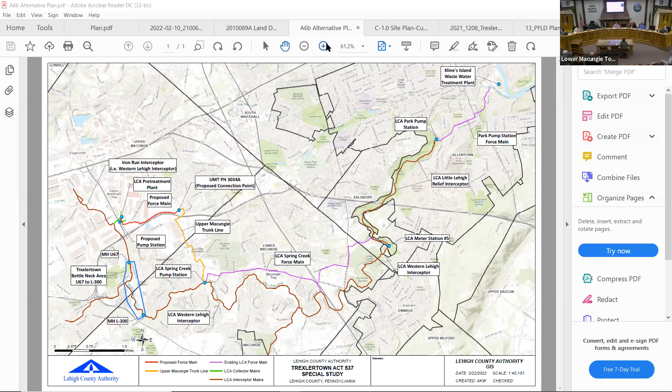Nate, if you can point for me, I want to start at the top of the system. It's hard to see, but the LCA Pre-Treatment Plant—Nate, if you can zoom in a little bit—sits in Upper Macungie. Then as you keep on going down with your pointer, the Western Lehigh Interceptor, keep going south—that area in blue is the bottleneck, and it's been an issue for some time now. This study is going to address that particular issue.

I do want to point out the boundaries. You can see, Nate, that diagonal line between Upper and Lower Macungie, so the problem splits both townships. The problem is that the pipe was laid too flat back in the 70s, so there are dry day and wet day problems in that particular area. And the problem with this area is that we're at the top of the system, so if you fix this part, we're just going to be pushing it further downstream. So we were in a predicament.

What we landed on was actually a suggestion from Upper Macungie. Nate, if you can point your cursor to the Upper Macungie trunk line—it's hard to see, it's that orange line. In Upper Macungie, they call it the trunk line, but in essence, it's an interceptor, and that collects Upper Macungie's waste, and actually Lower Macungie ties in a handful of times to that trunk line as well. That trunk line follows Mill Creek Road all the way down past the Walmart, and then it ties into just upstream of our Spring Creek pump station.

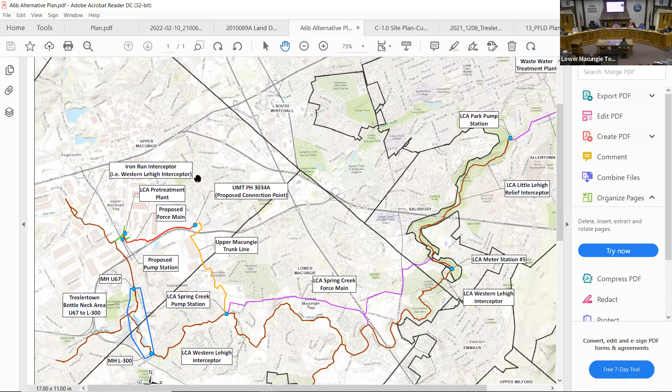One more question: the problem area, as you described, will that still stay in service? It's just you're diverting some of that flow to the proposed trunk line, correct? Yes, the area highlighted blue will still remain in service, it just won't see as much flow. Correct. Not to get too far in the weeds, but we're basically going to divert half the flow into Upper Macungie's trunk line, and it's all going to be controlled by actual levels in the Upper Macungie pipe.

And you've already approached Upper Macungie Township with this? Yes, they're on board. For my edification, you said the cost was divided between 7, what? Yeah, the Western Lehigh group, made of 7 municipalities, right? So we bear some portion of that. Yes.

So this is the first step to get DEP approval. Then we have to submit what's called a Part 2 permit, but you can't submit the Part 2 permit until 537 approval. So again, no specific response is needed if none is deemed necessary by the commission. If the two townships respond quickly, would that speed the process up? It would.

Unfortunately, Upper Macungie's planning commission doesn't meet till mid-April, so we're kind of stuck with that, but the sooner the better. What action are you looking for the planning commission to take? No real action, if there's any comments, just submit them, and they will be addressed in the final submission.

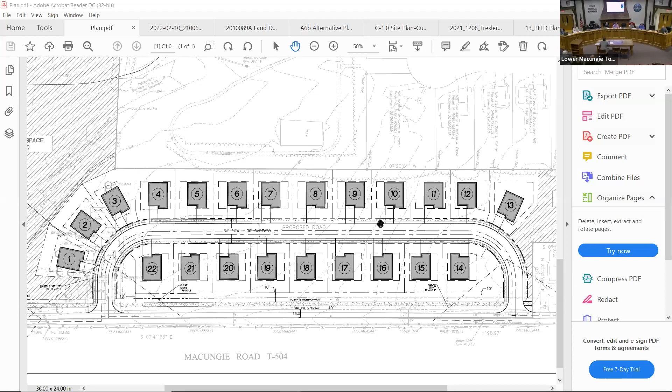And the screen's back up. Sorry, there was a glitch for a little while there where it wasn't up, but residents watching now should be able to see the plan. Are there any specific issues the applicant would like to bring up?

There's a few things I'll go over, and I'm going to take one out of order because I have a question. So on the lot area question, when I look at the SALDO, it says minimum lot area is the land area required for the creation of a lot as specified in the township zoning ordinance. And the zoning ordinance for lot area says an area of land determined by the limits of the property lines, and any portion of a lot included in the street right of way shall not be in the lot area.

So we do have some extra, the lots were larger than the minimum anyway. I'm not necessarily saying we wouldn't be able to accommodate it, but the engineer just had the question of why, if the SALDO references the zoning definition, it would be something different when there's no minimum lot size in the SALDO.

I thought the lot area definition stated that in the SALDO. That's the confusion he had, because he said you look in the SALDO definition and it makes you subtract certain things out. But when you look at the minimum lot area definition in the SALDO, it says refer to the zoning ordinance. So his only question was, are there other reasons why we subtract those out? Because to determine whether we meet the minimum lot area, it says go to the zoning ordinance.

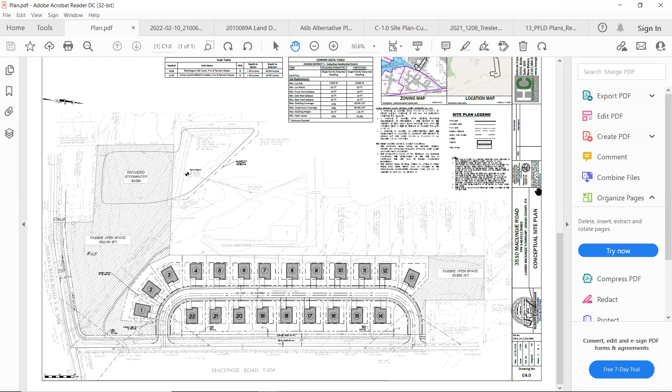Thank you for that input, I would definitely take that into consideration with my engineer. I think it needs to be public standards. And I believe the right of way shown here is 50 feet and the cartway is 30, which I believe does meet the minimum township requirements. Obviously there's no details about paving spec or anything like that yet.

Because I thought it would be difficult for a homeowners association with only 22 property owners to maintain a road. I think that's a heavy lift for the homeowners association.

But that's fair, that's an issue that's debated at the commissioner level. So you might want to see the commissioners as to whether or not they're willing to take the roads. That might be an issue you want answered sooner rather than later.

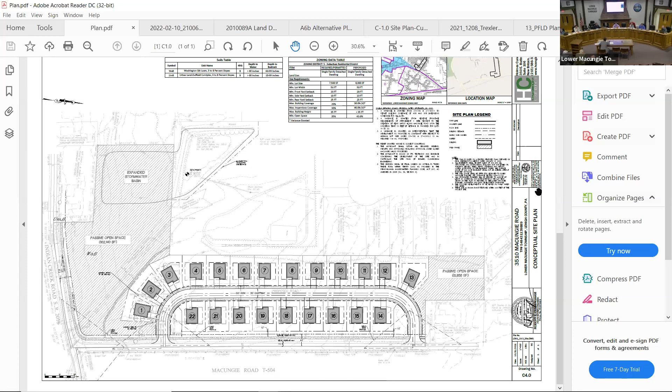Understood. All right, any other comments or questions? All right, we'll open it up to the public. Any comments from the public? Checking to see if we have anybody in the chat here. If you are a member of the public and you want to type a chat, please feel free. All right, we have a person with a question, Mr. Robert? No question, just a statement.

I would like to thank the applicant and his attorney and so forth for listening to the township and trying to move it in this direction. I think they've done a great job of trying to accommodate the wishes of the township, and would like to commend them for their plan. Thank you, and please come back to every meeting.

All right, well, this is only a sketch plan, so the Planning Commission doesn't need to take action, and we'll see you probably in a couple of months. Yeah, hopefully. Thanks for your time. Thank you. Thank you.

Okay, the next item on the agenda is the preliminary final land development plan of NH-Macungie, PA-1-UT, LLC. Nate, you want to bring the plan up and review it? I am. All right, and for members of the public, I'm starting the screen share here momentarily.

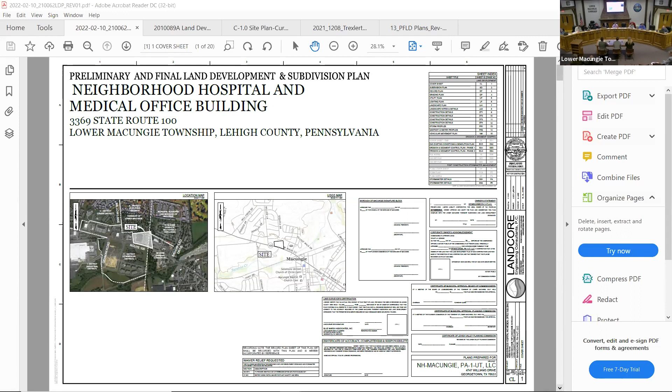Okay. We have the updated plan here for the neighborhood hospital that has been previously brought before the Planning Commission and now the Board of Commissioners for conditional use hearing. I should note to the Planning Commission, just so everybody's aware, the Board of Commissioners directed the Township Solicitor to put together a conditional use decision for approval for this, which I don't know if it has been circulated yet, but they did vote in the affirmative to proceed forward.

from a conditional use perspective. What's before us tonight was previously a preliminary plan. We're looking at a preliminary final plan now. So that's a new waiver request, but staff takes no exception to that, given the detail of the plan. I'll be frank, for members of the public, it includes a neighborhood hospital, which you can see here fronting upon Route 100, where the current old Weis is. That would be demoed and the new neighborhood hospital would be put in.

And there is a medical office building proposed at the rear of the site in the northeast corner. There's ancillary parking. I should note one thing that we have discussed consistently with partners in Macungie Borough, but also with members of the public, is it's our anticipation that this proposed development will reduce traffic from its prior traffic load on the site. And the current improvements on site are also reducing and ameliorating stormwater issues in this generalized area. So we're getting an improvement on both ends there. It's also our expectation we're getting an improvement in terms of lighting. The lighting will be dark sky compliant, so there'll be less glare from what's currently there.

We have received and reviewed prior renderings that we're quite comfortable with in terms of architectural scale and integrity. The only comment we had was the amount of EIFS, but beyond that, both the buildings looked great. We did speak at the conditional use hearing about the need for privacy with the residents at the rear of the site in the north. The applicant, the board, and staff talked about either fogging or screening on the north side windows of the medical office building so that the users would have privacy and the residents would have privacy as well. We were given a rendering at that point in time, and staff felt perfectly comfortable that it achieved its end goal of ensuring that there'd be that privacy factor.

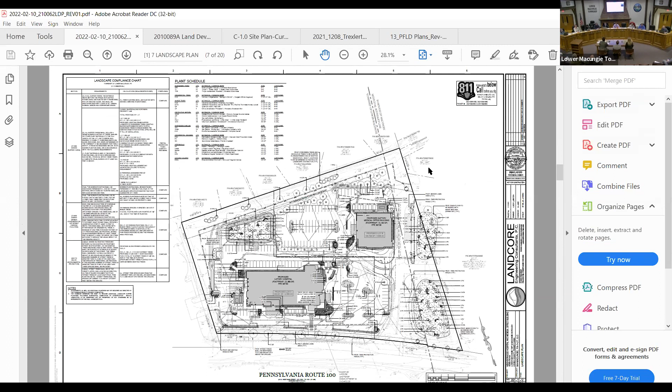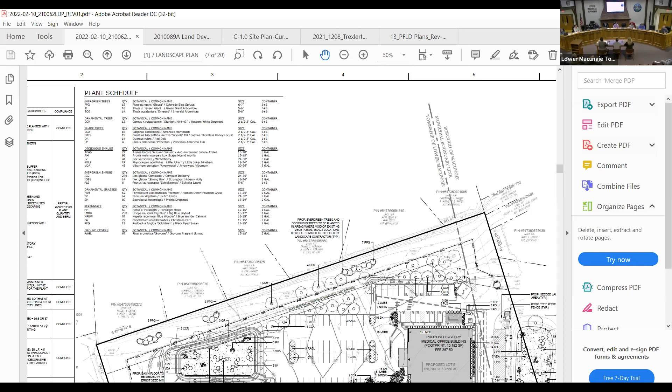Frankly, we're quite pleased with where everything's at to date. We just have one comment from a planning perspective, which I think is actually quite vital given the amount of feedback that we've received from abutting residences, and which has been a discussion point, which is specifically the need for continued buffering on the north end of the site. The existing tree line buffer has been suffering from some sort of fungus or disease for some time. In a recent windstorm, one of the larger trees fell down. It fell onto an abutting residence. It was an older growth tree. It went into their yard. I don't know if it's been broken up yet and taken care of, but that buffer as it currently sits is likely not long for this world as it's currently designed.

We've recommended that, however it gets worked out, an arborist get in there and figure out which trees are the most damaged, which can be saved, and which cannot. The current landscape plan is recommending patching that buffer, which we take no exception with. I do believe that there are blue spruces proposed. I would highly advise that we be careful, because those are ones that are suffering from some of these fungus infections right now. So we might want to look at a different species.

The other thing we have assured applicants and abutters of, and expressed to the applicant, is the need for one of our Class C buffers to ensure that privacy factor is there. That would include a mix of deciduous and evergreen plantings, shrubs, grasses and perennials they see fit for ornamental purposes for their clientele. But the big thing for us, in no uncertain terms, is we just need to create a green wall for the next door neighbors.

That was discussed previously, and that was really one of the only discussion points. Beyond that, the rain garden, or the infiltration basin that also takes on the rain garden, looks wonderful. Everything else on the site has been coming along really great. That's the only comment we have, and it's based on the number of phone calls we've received from people in the neighborhood. So I have no other planning comments. In fact, we're quite comfortable with everything else at this point, other than hashing out this planting situation.

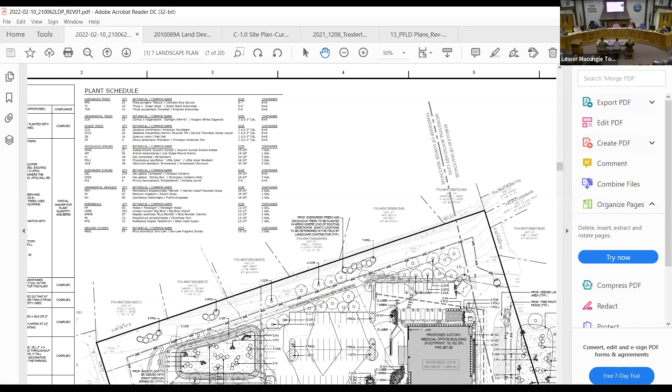Thanks, Nate. I'd like to point out that some of the larger revisions since the last plan was here include the internal intersection alignment. The applicant has realigned some of those intersections so that they're directly across each other, not staggered, which we certainly appreciate.

And the stormwater management calculations provided this round are much better and really address the majority of our concerns for stormwater management. Our outstanding concerns are the landscape buffer, as Nate had mentioned, we certainly want to have that addressed, and that the Class C buffer is provided for the ordinance.

As well, while the traffic is being reduced, our traffic engineer had provided a handful of comments that still need to be addressed, particularly with the traffic for the site, so that we can ensure there's adequate parking. And then I think we're also looking for a lot area calculation, or an opinion from our zoning officer for the lot area calculation that we discussed.

If the township parcel, if the Macungie Borough parcel, is included in some of those lot area calculations - so that's the impervious lot, building coverage and impervious area for the site - we just wanted to get feedback from the zoning officer to understand if the borough lot area is included in that calculation or not.

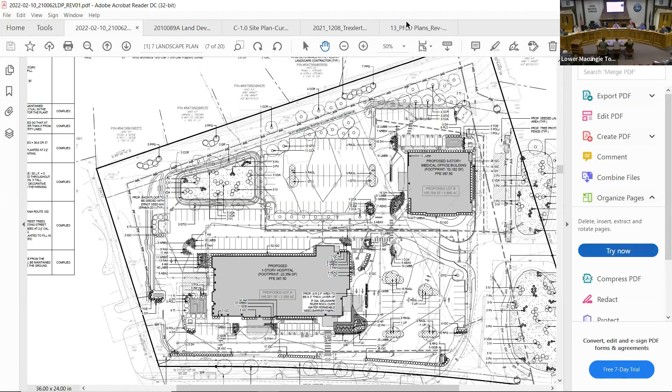All right, any other comments or questions from the planning commission? We'll open it up to the public. Any comments or questions from the public at this time? If you are on the Zoom meeting and you have questions or comments, now's a good time for you to type them in so we can address them with the applicants. Just saying, for the 4 attendees online right now.

Attorney Lair, I think you received a copy of the draft motion. Have you had a chance to take a look at that and the conditions presented in the draft motion? Yes, we have reviewed it, as well as the applicant representatives, and they are acceptable to us. Thank you. We don't have anybody typing anything, so...

All right, at this time we'll entertain a motion. Is there a motion? I'll make that motion. This is a motion to recommend approval of the proposed NH Macungie PA 1 UT LLC preliminary final, conditioned upon the following.

Compliance with all Lower Macungie Township engineer, Lower Macungie Township traffic engineer, Macungie Borough engineer, Lower Macungie Township Planning Department, and zoning officer review letters. Compliance with any and all conditions set forth in conditional use approval by the Lower Macungie Township Board of Commissioners. The applicant shall construct the proposed buildings in conformity with the testimony and exhibits. The structure shall conform to all design requirements as set forth in the zoning code, chapter 27. The applicant shall submit detailed color elevations at the time of building permit application, to be reviewed by the township review officer, township zoning officer, and township planning department for compliance with this condition.

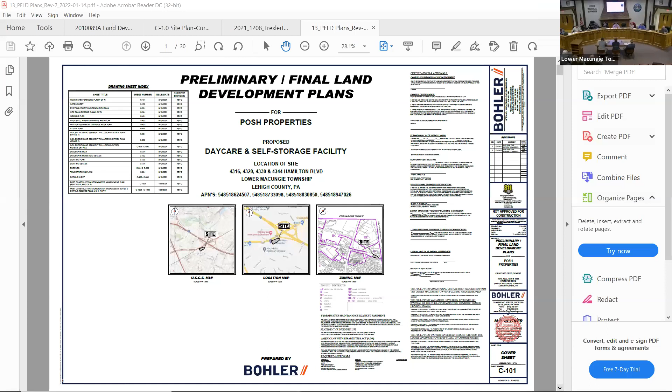Sure thing. We're starting up here on the screen share as previously, for members of the public who may be watching. I should note for the record, as we had previously mentioned at the last appearance of the Posh Group for this land development plan, that this was really waiting on one item in particular, and that was the review and approval of the emergency access road for the Township Fire Marshal. I should note we've had a couple of rather severe fires in the township. I'm sure everybody has read that in the newspaper and seen it on 69 News over the last couple of weeks, which is what appears to me to have led to a delay in some of the review that we're getting.

They've had to go out to the apartment building and some of the other fires in the township when it comes to reviewing the structure. That being said, we are in a position where we did tell the applicant that this item would be on the agenda again this month. As far as I'm concerned, there are no outstanding planning items. We've covered everything. For those watching at home or on YouTube after this, the use consists of a self-storage facility and a daycare center. We mentioned proper buffering from the residences to the south. The applicant has provided that to us.

We've also recommended adequate buffering of the play area for the daycare center, and that has been addressed as well. One thing we discussed internally on multiple occasions was the ability of vehicles to traverse the site internally - that's a technical item I'll let the township engineer speak to. They have voluntarily put in a walking path to the cul-de-sac on Schuler Lane to ensure school buses would be able to pick up and drop off students from the daycare center. They've now included, on three sides between parking and the emergency access road right along the structure, an emergency access for fire or life safety if necessary. The basin is at the rear of the site, and it's proposed to be naturalized.

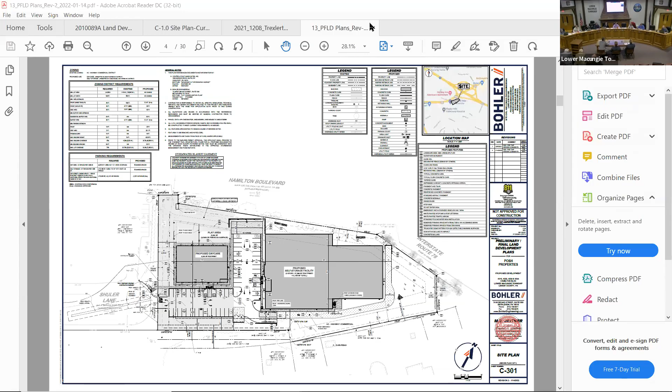All right, we'll open it up to public comment. Any comment from the public? Comment from those people participating remotely? You can just type in your comment or question using the chat feature. While we wait for that, just to make sure all the planning commission members are comfortable moving forward with the plan, making a recommendation tonight.

Attorney Schock, I think you received the draft conditions of approval. Yes. Have you had a chance to take a look at that? Do you have any issues with it? I've reviewed it with my client and the engineer. They're accepting. Thanks.

Okay, at this point we'll entertain a motion. Is there a motion? Amy, you're going to take care of this again for us?

Motion to recommend approval of the Posh Properties proposed commercial development preliminary final plan, conditioned upon the following: Number one, compliance with all township engineer, planning department, and zoning officer review letters to the written satisfaction of each. Number two, the applicant and their successors in interest shall be responsible for the maintenance and any needed replacement of all on-site landscaping per the approved plan in perpetuity. Number three, the applicant shall construct the proposed fire access drive to the written satisfaction of the township engineer to ensure appropriate accessibility prior to plan recording.

Number four, the applicant shall install a lit monument sign visible from the outbound lane of Hamilton Boulevard reading, 'Thank you for visiting Lower Macungie Township.' The applicant may note beneath, 'Courtesy of Posh Storage and Kiddie Academy.' The monument sign shall be reviewed and approved by the township zoning officer and planning department and placed on the final plan prior to recording. Number five, all structures shall be constructed matching design renderings presented to the township, reviewed and approved to the written satisfaction of the township zoning officer and township planning department prior to the issuance of building permits.

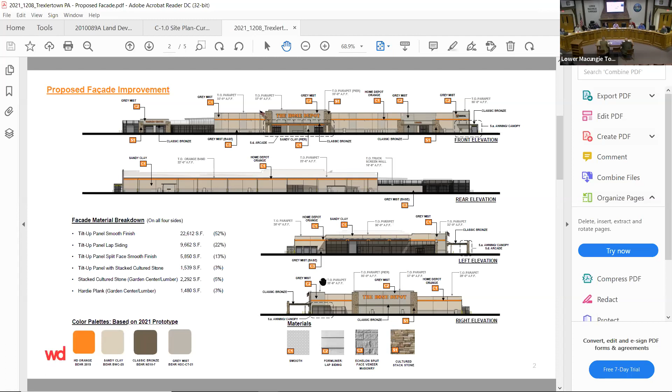So there was that street front presence. They've really kind of taken what's on the front and put it on the side as well, which we'd like to commend them for. We think that's going to be a great improvement. There's going to be heavy use of stacked stone on the site, which we think is in line with what we're trying to achieve in terms of our materials moving forward.

The hope is that can then resonate throughout the rest of the development when sections 1 through 3 get developed. The garden center is up here at the north part of the site, which is, as I'm sure everybody knows, kind of a separate area. And then they have the tool rental area here at the southern end of the site.

The view from the southern end of the site shows you the street facade that you'll see from Hamilton Boulevard, while keeping with a lot of the other design factors that you see at Home Depot's used regularly. So we're very happy with how this has turned out from an architectural standpoint to date, and we're excited to see how the future of the site with development areas 1, 2, and 3 turn out.

But the goal is shared parking. The goal is cross-pollination, where people will grab a bite to eat while they shop here. That's what we intend to do, and what was done with Hamilton Crossing. It's what we'd like to hopefully see here eventually as well.

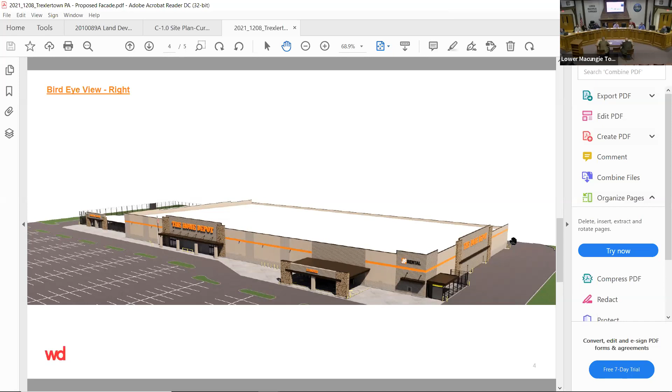So beyond that, everything else is really technical. It's currently being reviewed by the Township Engineer's Office with respect to the NPDES and the stormwater for the site. And as far as the Township Zoning Officer and I are concerned, at least the structure of Home Depot itself, as you see right here, is in line with everything that we're looking for. So with that, I'd hand it over to Brian, and you, Mr. Chair, to talk to any other points that may come up.

Sure, thank you, Nate. Just to reiterate, we have not done a formal review of this site. The applicant is currently revising stormwater management facilities. So until we get a final design on those facilities, or a submission to the Conservation District, we'll go through and actually review the stormwater management. We've been involved with the pre-application meetings with the Conservation District. It's currently an ongoing process, but there's not much to add beyond that.

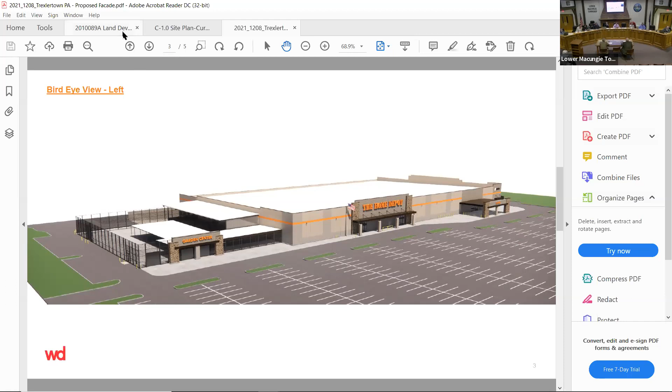We have some properties over on the east side of the property. There's a dentist office back there — the dentist on the lane that you hear about on TV all the time is back there in the corner. But we don't have much else as far as other properties around us.

Basically, the utilities and everything else on the site are going to work the way they were originally designed. We don't have to go back out to PennDOT right away for anything. We already have water brought into the site, and we have sewer brought into the site.

We have gas brought onto the site, and there's electric and communications that are already in the site. So this is basically coming in and trying to finish a project that was started in 2006.

With that, John's been working with the township and with Home Depot and WD Architects, who are designing the building. John, you want to talk about the building and changes from the prototype?

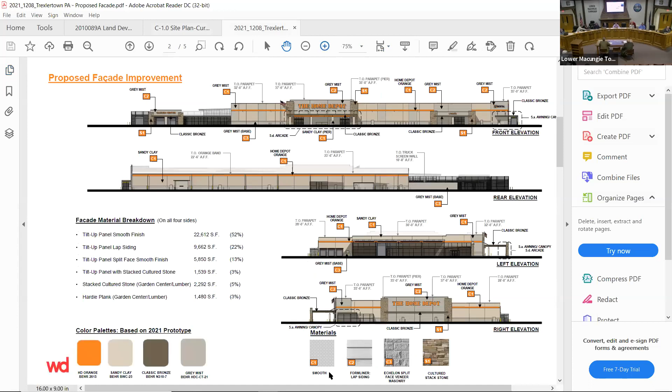Sure, thank you very much for allowing us to present. I'd like to thank both the planning and engineering departments, they have great coordination and cooperation from staff. It's been really good. As Nathan mentioned, you probably, if I'm not sure who was on the board back in 2006, Maury...

I'm sure he can attest to the fact that what was originally planned was quite simply a monotone concrete panel box. There was an in-vestibule and out-vestibule with a standing seam orange metal roof. The garden center was just chain link fence around 3 sides, and the lumber canopy was, quite frankly, 2 poles holding up once again an orange metal seam roof.

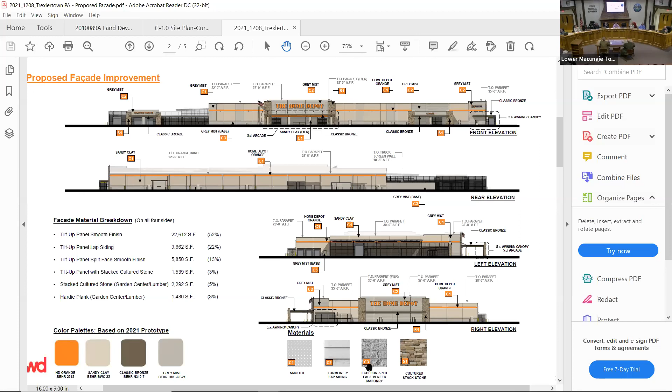What we have here are enhanced articulations, and this actually is not even the prototype front. This is an enhanced version of it as well.

Let's stick with the front. So, for instance, over the front entrance, we have the articulation of the stacked stones and the pilasters. There is a metal canopy with columns. Behind the signage is like a clapboard - it's a Hardie Plank.

While the panels are concrete panels, the bases are stamped to look like block. And as it goes up, we use the metal, the orange band, and in the vertical plane to kind of break it up, we're also using two different colors in certain panels. So we try to take the long, continuous, monotone appearance of the prior approved building and begin to break it up, again, using the stacked stone.

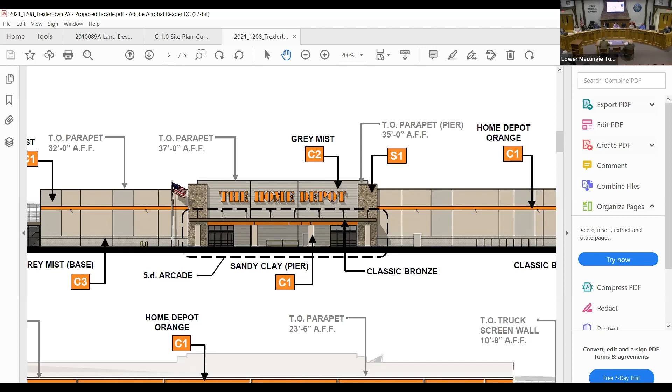I think also we're using this - Nathan, if you can help me - one of the buildings you referenced for the entrance canopy where we use the metal, maybe it harkens back to some of the metal foundries from the area as well.

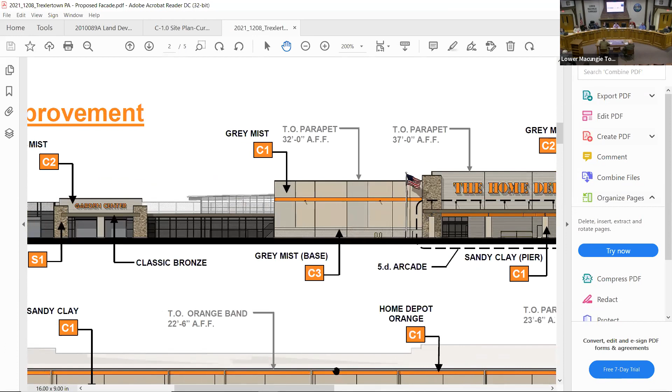If you'd slide back to the garden center. Prior, the garden center, quite frankly, was just a black chain link metal fence, didn't have an articulated entrance like that. Once again, we use stacked stone, and you see the clapboard finish behind the signage.

If you would slide just to the other end. And again, vastly improved lumber canopy. Once again, where the structure that holds up the canopy is of the stacked stone, and then the tool rental center is articulated as even a separate entrance with the same metal, like a smaller metal canopy than the front had.

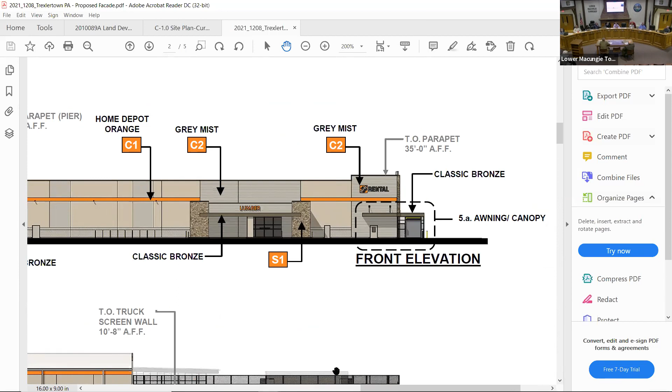Once again, with the clapboard along the corner. And the other thing, as Nathan had mentioned, and even Bud, we had the garden center facing Hamilton, and that was just a plain paneled, concrete paneled facade. Where now we are giving, once again, the appearance that we're breaking it up and to provide sort of like a false front, if you will.

We're not really encouraging people to go there, but it's taking over the pilasters of the stacked stone. And we're introducing that metal band that we have as part of the canopy in the front. Almost, it's not going to stick out - it may have like a 6 or 8 inch reveal. But again, it tries not to be the side of the building, it tries to give it a little more articulation.

Where just above that, on the northern facade, is the garden center. And the garden center fence now is a vinyl coated chain link fence, where the lower two-thirds are a tighter weave, and the upper portion is a little bit less of a weave. So that's why it looks a little darker on the bottom than on the top.

I think we certainly appreciate you incorporating certain design features to improve the appearance of the building. We appreciate your effort in that regard.

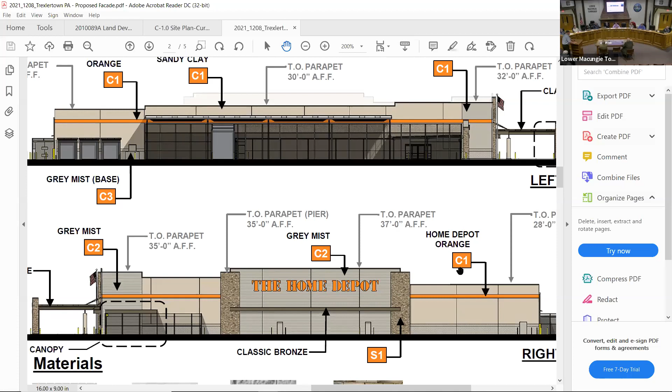Go ahead, Mari - I just wanted to clarify that. Could you bring up the site plan again, Nate? Okay, the 3 pad sites that Nate was referring to are just the part that's carved out of what had been the Home Depot parking on the other side of the main entrance road. There's a few acres of additional pad sites that's above and beyond those 3 uses.

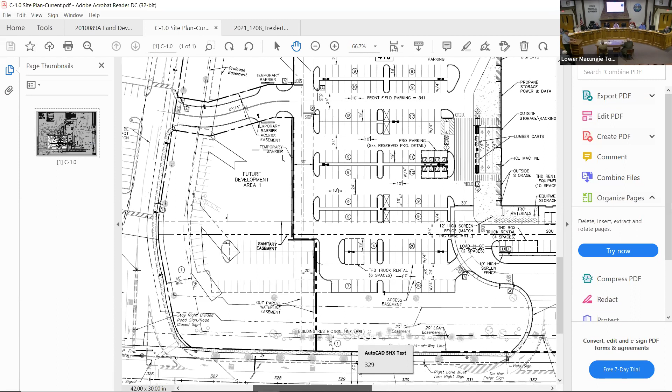So I guess that's in a different NPDES permit, so that's the reason it's not - No, that's the same NPDES permit, Maury. So it's really more than 3? Yes - there is a property owner that owns the underlying property, and Home Depot is renting from them. These other 2 parcels are controlled by RB Grange Associates, which is the same people that have Trexlertown Marketplace next to our office on Mill Creek Road, with Walgreens and Chick-fil-A. They own that property also, same property owners. So it's really then 5 pad sites that are going to be developed in addition to the Home Depot. Just wanted to clarify, thanks.

And moving forward in the future, the preference with the 3 new pad sites as well as the 2 existing ones is that now we're working with a common design element and scheme.

The goal is to make sure everything's interconnected here, like we've done at Hamilton Crossings, in terms of design and accessibility from one spot to the other, so you can safely get from Home Depot to whatever user ends up being here, hypothetically a restaurant or whatnot. We're working on our Hamilton corridor plan design, ensuring there's outdoor seating oriented towards the boulevard and not the parking spaces. We'll work with them as those come in moving forward, but right now we're focusing on the store, which will be the anchor tenant for the site.

Wes asked: if the pad sites had the additional parking for Home Depot, when three new businesses get built there, is their parking factored in? They'll have to provide enough parking on site. The three parcels on the right-hand side have to comply with the stormwater and parking requirements for the rest of the site, so they're only allowed 60% impervious cover and have to provide their own parking based on whatever the use is at that time.

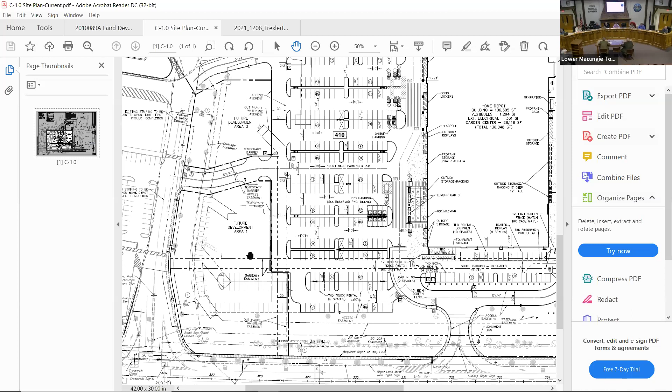Thank you. So in the design element, you mentioned this is kind of a prototype for Home Depot, but really more over and above what's out there. Are there any similar sites? Maybe we could look online just to see what this different rendition looks like.

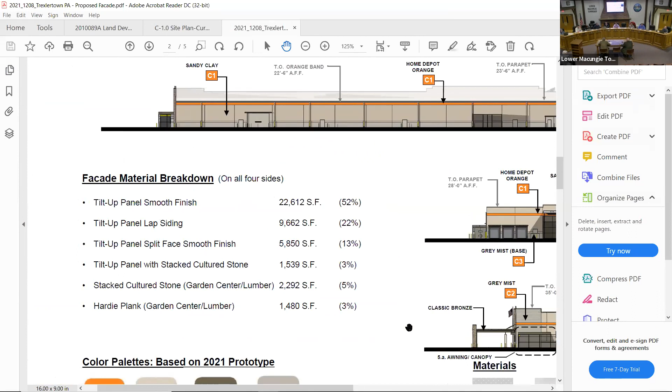Everywhere I've ever gone, they look pretty much like the one you'd see on Lehigh Street or in Allentown or Whitehall. The last one I opened was Haymarket, Virginia. Pretty country out there. When they originally gave this to us, the first example was Denver, but it doesn't have the stone. We found a lot in Colorado utilizing stone and other elements, as well as a couple in Washington State, and if you go down to Florida or Southern California there are those architectural elements too. I'd do a simple Google search just for my own curiosity. It opened last fall, I believe.

Interesting. In previous discussions on some of these larger developments we've talked about having charging stations for electric cars. I didn't see that here, but is that something that would be integrated? To be honest, we haven't discussed it at all, Wesley, but I guess we can take it back to Home Depot. Again, it's something we can clearly look at, because the parking spaces are there, whether you designate it or not. It would be a parking space, but with electric chargers, which requires a significant improvement as far as electric capability.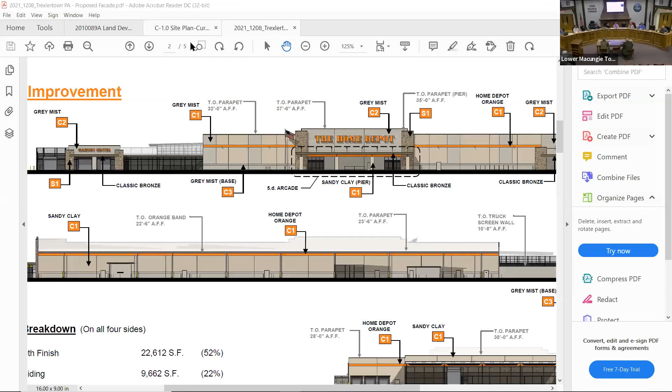Generally, the high volume driveway was installed. That included the right turn lane into the site. The center lane turn pattern out on Hamilton Boulevard was converted to a left turn pattern, both going into this driveway and also into Shepherd Lane on the opposite side. We also have the right turn, right in, right out driveway that has a right turn lane going into it. That all was constructed and approved by PennDOT.

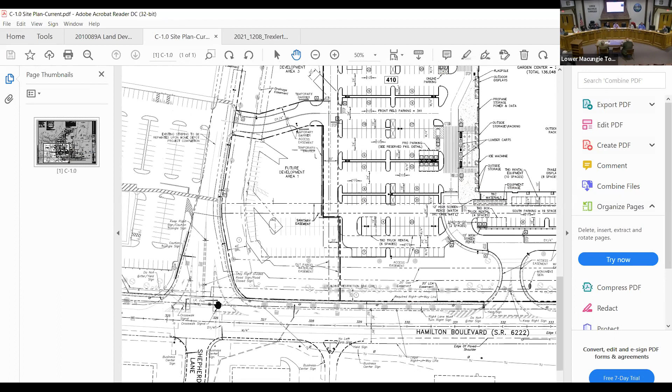The traffic light was put in at the main driveway. That was all put in and approved by PennDOT. We had an issue with PennDOT after it was put in because the store wasn't being built. There was some question if PennDOT was going to let us activate the traffic light, but we convinced them that because of the benefit to the village at Shepherd's Hill, we'd get more traffic in and out of that driveway if it was signalized, and PennDOT eventually agreed to let us operate that traffic light since 2007 when it was installed.

Once the site builds out, because there's so little traffic coming out Shepherd Lane, the traffic from the north side is going to dominate the side street traffic. At that point, we're going to have to give more green time to the side street. That was originally proposed when the original traffic study was done, but it wasn't necessary for the last 14 years that we've been waiting for the store to get built.

So is it correct to say that traffic coming from the west will use the light to enter the site and in theory exit the site, but most traffic from the east will use the entrance that's just before that light? Is that kind of the pattern?

Basically for the Home Depot traffic, if you're coming from the east, you go in the right turn driveway and you go out the main driveway. If you're coming from the west, you go in the main driveway, and if you're going back out to the west, you go out the right turn out driveway.

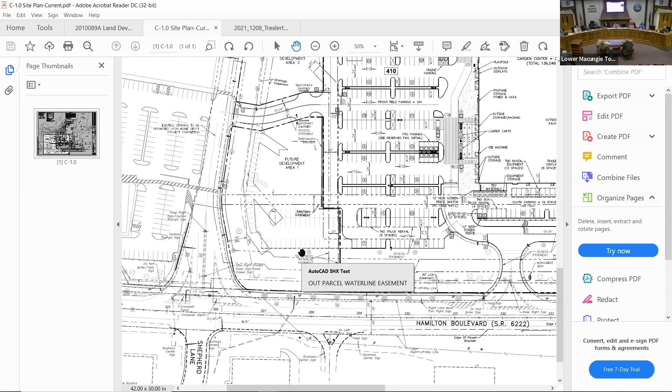All right, again, we don't have to take action tonight. There's really nothing to take action on. It's a courtesy review, and eventually you'll wind up in front of the Board of Commissioners. Yes, thank you very much.

Will glare from lighting be minimized? It looks like that was a last question, and I can jump in right there. The applicants did note that they're switching to new standards that are dark sky compliant. The old lighting is going to be removed, new lighting will come in, and I would presume abutting residences aren't going to see nearly as much light as they would have under the old type of lighting.

Going from the 40-foot mast arms that were permitted at that time down to the 25 feet per the current ordinance.

Okay, good to see this happen. Good. All right, thanks. Thank you again. Thank you. Thank you.

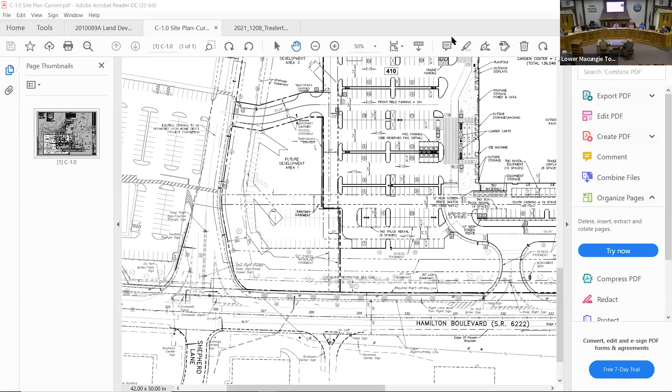Finally, we're at 7991 Quarry Road, preliminary final plan.

We have our last plan for the evening here. This is 7991 Quarry Road, the prior quarry off of Quarry Road. I should note the new Sauerkraut Lane extension, which is currently under construction. The new site will take their frontage off of Sauerkraut when it is complete. That road's still under construction right now, so this is kind of a to-be-completed situation, but when that road is done, they will have access there.

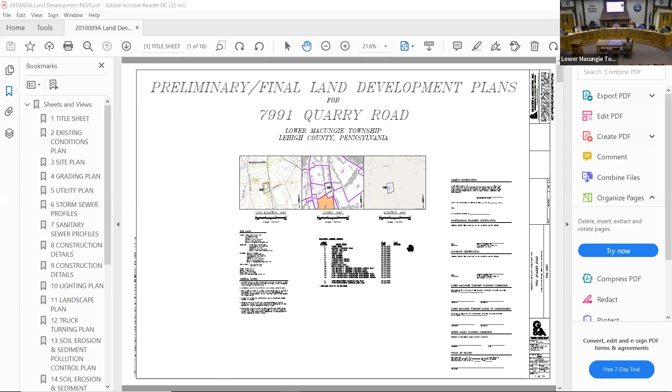It's important to note, for those who might be watching from home and had concerns, that this site is a prior quarry, filled in. This would essentially be the last lot in this area of this zoning district that would allow for a distribution or industrial use such as this. The one previously reviewed by the Planning Commission, lot 12 of Spring Creek Settlement Subdivision, is right next to the site. This is the next one, and this is the last one. We do get those questions from our neighbors in the boroughs as well as residents in the township - this would be the last lot in the Spring Creek Highway Industrial District.

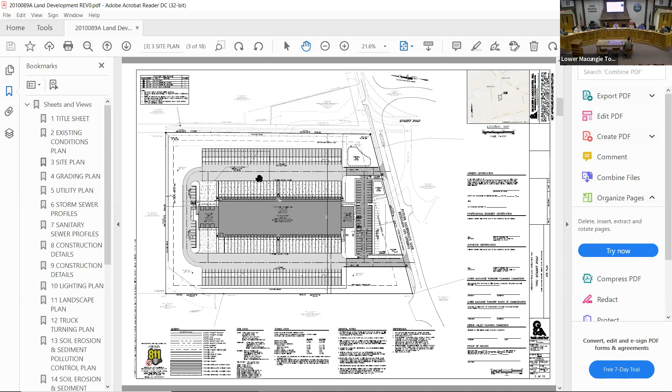What you can see here from the plan is a similar structure to several that we're not all that unfamiliar with. There's adequate and ample truck parking, as you can see.

My understanding is this is labeled as a proposed warehouse, but I do believe there would be an automotive use to it as well. There's proposed office in the front and a proposed shop in the back. There's oversized truck parking, and then plenty of trailer storage sites around the site, as you can see. Potential rain garden in the north part of the site there.

And then if I get to the landscaping plan, and I'll do that as we continue to discuss here, there's actually a lot of generous plantings out in the front. So we do appreciate that. A couple of points that did come up here. We did speak with the township solicitor on this front, so this is helpful.

This site is being developed independently of the Spring Creek Settlement subdivision, so it will need to comply with our current zoning ordinances. Reason why I bring that up is we did spend a lot of time as a township for uses such as this, making sure that there were specific amenities in place for the users of this site that would also offset concerns for residents of abutting communities - what we call amenity space. So like a driver's lounge or that type of thing so that they can rest at the site. That'll avoid off-street or on-street parking of trailers in our community by keeping them on site here.

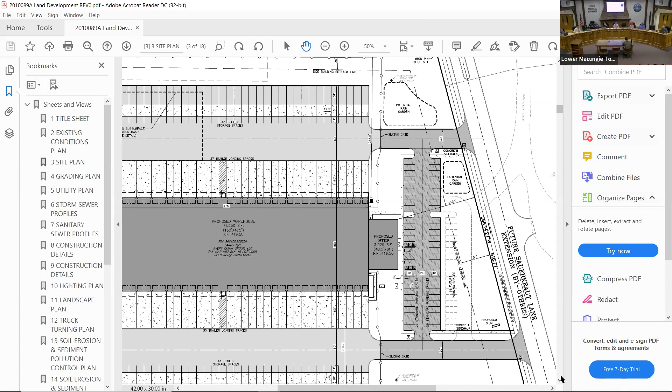Likewise, we do have strong buffering requirements, and this would be a site that generally would require what we call the Class C buffer that we were talking about before with the berm and whatnot. But I should note that all the abutting uses are industrial, so it would seem kind of counterintuitive to put that in. The Class C berms and buffers were designed to really hide the use from the street and whatnot.

The frontage of this site along the new Sauerkraut Lane extension is proposing a lot of ornamental flowering trees, which is a good benefit, so I don't see that being an improvement needed there. One thing the Planning Commission may want to discuss with the applicant is with all that landscaping and greenery, where else that could go or get utilized elsewhere, because the ordinance does call for a certain number of plantings per parking spaces. But beyond that, this is fairly simple.

There is a lot of geotech going on out at the site. This is a quarry that's getting filled in, that's going to have a structure on top of it. I will defer to the township engineer to discuss that. But as far as we're concerned, we're very familiar with these types of developments, as we are very well aware of right across the street on Spring Creek Road. So this will be the last one, and we'll work with them to talk about some of the technical items.

I should note that we don't have a technical engineering review for this plan this month due to the volume of submissions. We do expect that next month, but we wanted to bring up planning topics, allow for the Planning Commission to offer initial feedback, and give the opportunity for the applicants to present to the Planning Commission for the first time before technical review comes in.

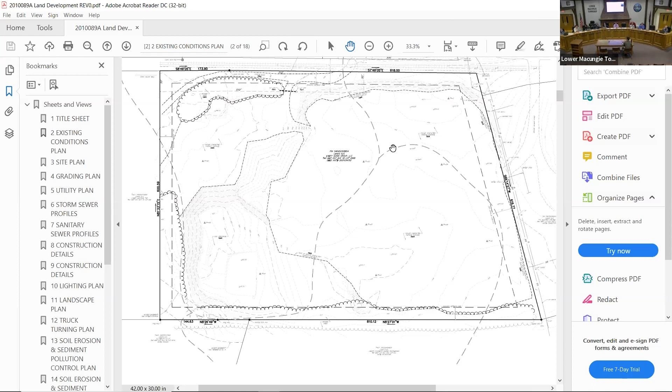Well, to finish, I just want to say that we are going to be looking very closely at your geotechnical reports moving forward. There's obviously a lot of work to be done before those reports are finalized, and they have to show that the site is structurally stable—months worth of work before we get those reports. So, thank you, Brian.

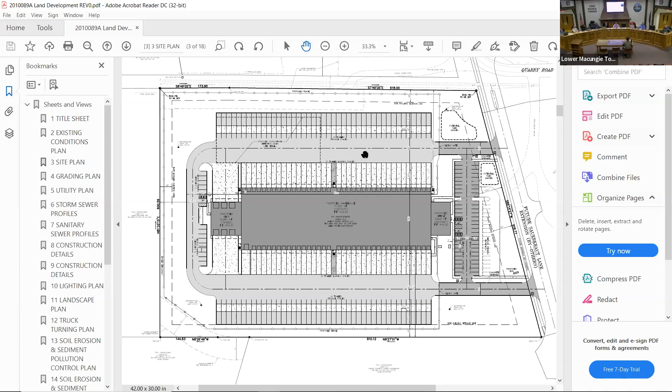One thing I'll just point out, the stormwater where it says potential rain garden, that's kind of in flux because it was a quarry. It's a little bit unique. We have an initial meeting. I had some informal discussions with the Conservation District to kind of see how they're going to gauge it. And then I spoke with Brian's office and said, when they get to that part of the technical review, have that discussion. I also have an NPDES pre-application meeting later this month with the Conservation District. So that's why, since it's not your typical virgin piece of land, how exactly that gets handled is why those are placeholders.

And that area would be a good spot to throw some of the plantings that would have otherwise been required over in buffers and other areas, to augment the rain garden, which we support anyway. It's been done in a couple of other spots with shrubs and trees along the edge. So that's an opportunity right there.

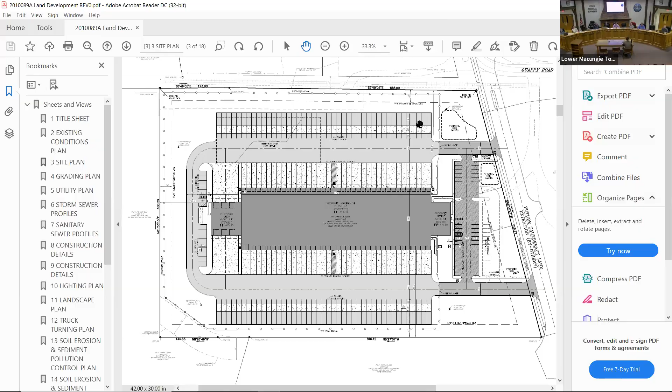All right, why don't we open it up to public comment? In the audience, comments or questions? We'll also open it up to anyone participating remotely. If you have a question or comment, type it in using the chat feature.

Nothing coming in yet. All right, well, this is a preliminary plan application, so we should table action tonight. There's a motion to table. Is there a second? Second by Wes. Any further discussion? All in favor, say aye. Aye. The motion to table passes. Thanks. Thank you.

That wraps up the regular agenda items. Nate, anything in terms of a department report? I only have one item, just so the planning commission is aware.

We were authorized by the Board of Commissioners at their last meeting to send staff to this month's zoning hearing board meeting. We're not exactly sure who it'll be yet, but the presumption is it'll be township solicitor, engineer, maybe myself. This is with respect to a property on Wild Cherry, right next to the townhomes, but before you get to the bridge. It's a diamond-shaped property right next to our new trail. I don't have the exact address for you, but essentially a party bought that and they've been trying to figure out a way to develop it for some time. The lot's incredibly encumbered with a lot of floodplain as well as utility easements. At one point, they were looking at single-family homes, but they were proposing single-family homes within the 100-year floodplain, which isn't allowed under our ordinances.